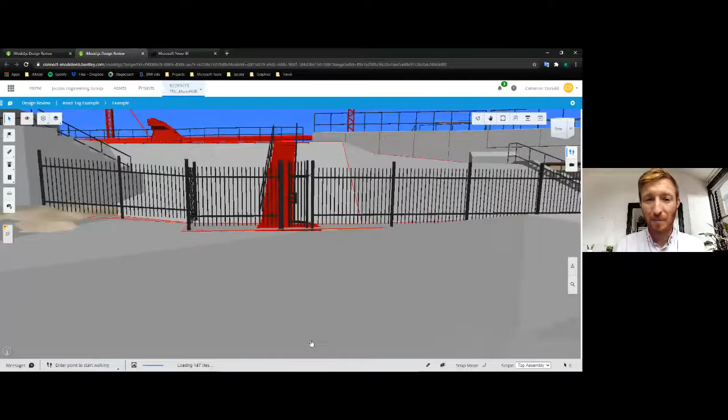This includes on-site insights, and this is of course the first digital one in the current climate. You'll see us as we are now, here on part of the Trans-Pennine route, about to enter the railway. We also do talks from the top, in which senior members of organisations give insights about asset management to our members, other networking events and new methodologies such as hackathons, and we have our own conference stream.

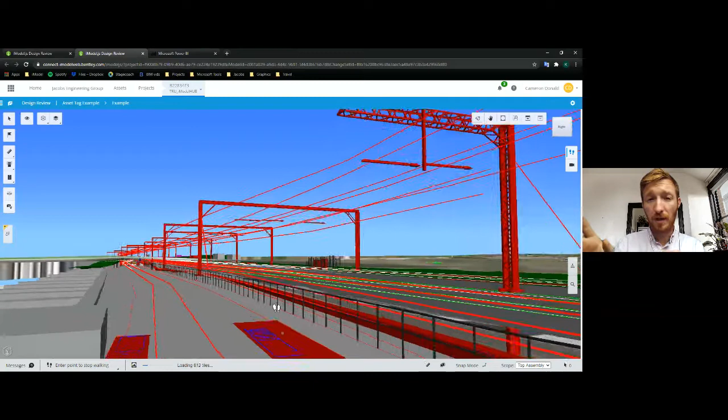Hi, good afternoon, and pleasure to meet you all virtually. First time I've done one of these myself, so it's an interesting and new experience, and enjoyable so far. Hopefully you all enjoy this journey with us.

So what I'll do is give you a little bit of an overview of what TRU is and a bit about our team, and then we'll go into more detail about some of the disciplines that make up our team on TRU.

So the Trans-Pennine route upgrade, we keep saying TRU, is a rail upgrade and enhancement program that runs from Manchester Victoria to Leeds, and then on to York, calling through stations such as Huddersfield and Dewsbury. It's a mixture of new build and also a mixture of renewals of existing infrastructure.

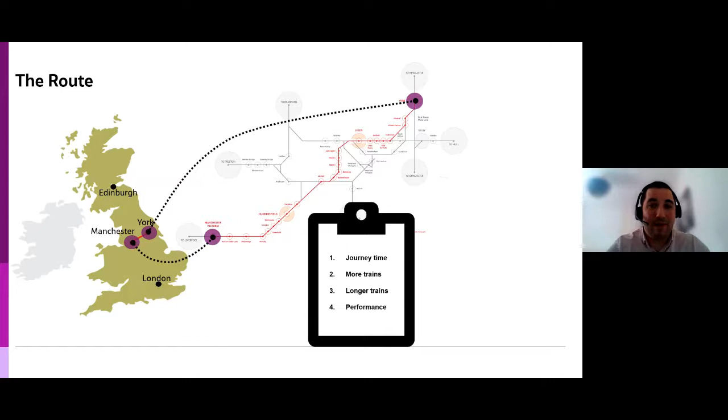It's got four primary objectives. One is reduced journey time, so A to B to C faster - faster times predominantly between Manchester Victoria and Leeds station, and between Leeds and York and vice versa.

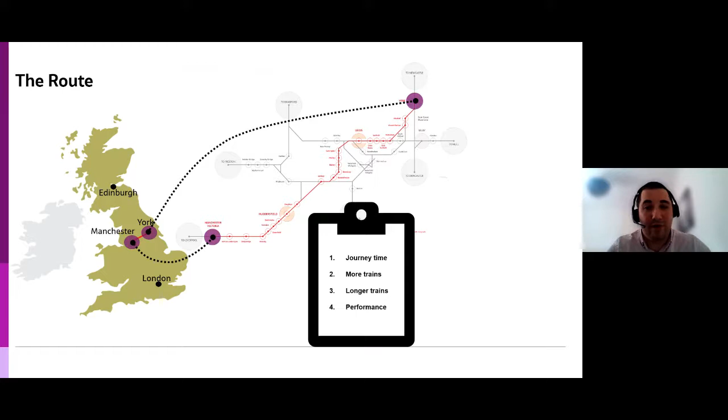It allows people to commute between these major cities quicker and more efficiently. More trains, so more services running, longer trains - going from 3 carriages to 6 carriages in some cases - and increased performance as well. That's timetable performance, but also performance related to infrastructure reliability. So can we make a railway that has less infrastructure failure and therefore fewer service-affecting failures, so your train turns up on time or within a reasonable amount of time of its arrival or departure.

It's a multi-billion-pound program, currently over 700 people on the program - that's probably nearly going over to 1,000 now. It's continuing to grow, and it will continue to grow as the program develops.

It's a very diverse program made up of different organisations supporting Network Rail. We also have alliance delivery partners split by east and west of Leeds, so lots of familiar names there like Arup, Amey, Bam Nuttall, Systra, Volker Rail, Siemens. So there's pretty much a lot of people involved in this program - it's a very complex program - and obviously all of the subs below that as well.

In terms of assets, we've got quite a lot of assets on the program, over the 110 miles of the route. A lot of that infrastructure is aging and has been maintained well over a period of time, but it is now challenging to maintain at the moment. So it is a part of the network that is very ready for an upgrade and an enhancement, and we'll talk a little bit more about that and how we're helping with that as we go through.

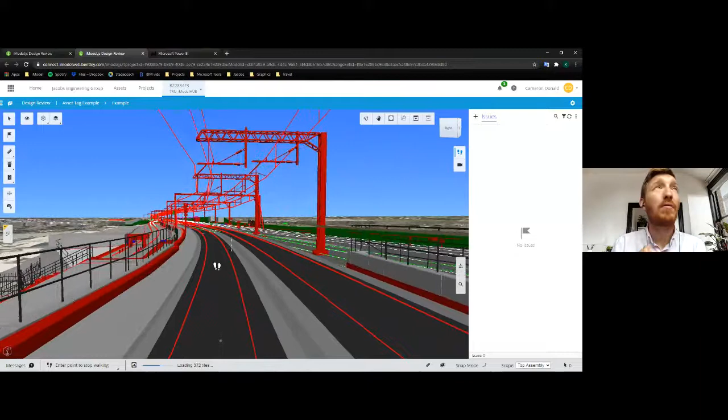Essentially, one of our findings throughout this program is quite how much diamond crossover assets contribute to lifecycle cost of a potential project. A diamond crossover is basically a piece of switches and crossings which enables a train to cross in either direction between two parallel tracks. It looks like a diamond, but the cost of operations and maintenance of that asset throughout 100 years can be quite significant. This is just one of the small findings we've encountered throughout the TRU program.

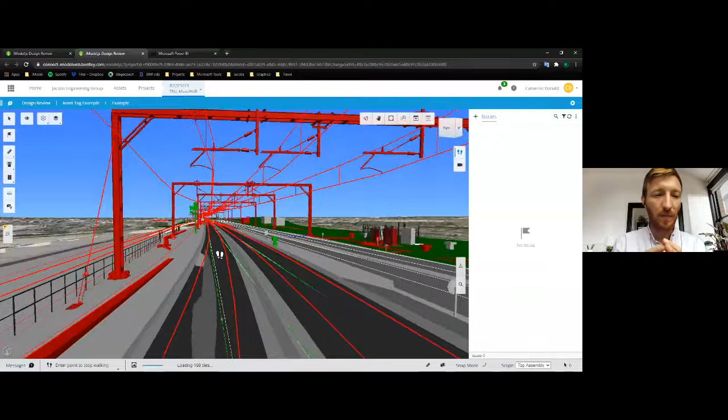Network Rail have a requirement that any project of over £3 million value must select the lowest lifecycle cost option, or present justification to the route managing director - a very senior person within the region - as to why it's been selected. This means lifecycle cost must be considered at all times. It doesn't have to be based on lifecycle cost justification, but if not, it requires other justification as to why it's been selected.

Essentially, the application of these principles is aimed at enhancing the financial sustainability of the railway, which benefits everyone - the taxpayer and Network Rail.

TRU is basically the first time this level of lifecycle cost analysis has been undertaken on a major railway infrastructure program. In this time, we've worked with Network Rail Advanced Analytics team using their proprietary tool to both complete lifecycle costing, but also embed it within the decision making of the TRU program. So all decisions on major project interventions are based on lifecycle cost, or incorporate lifecycle cost thinking.

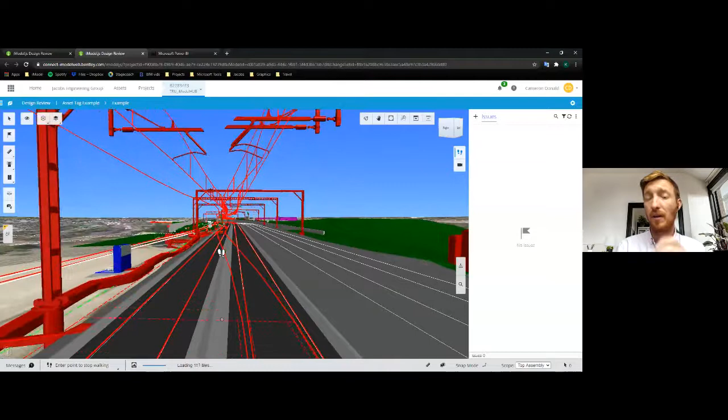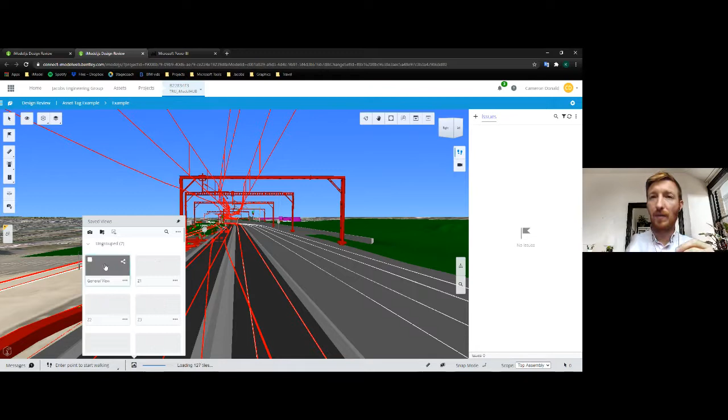Essentially, what this means is we have a number of asset lifecycle profiles which are based on data from Network Rail Advanced Analytics, and each one of these contains unit costs and different types and frequencies of interventions. Each different intervention on a project is modelled using these lifecycle cost profiles and aggregated together to produce a 100-year lifecycle cost calculation.

These are then used within reports, at points when decisions have to be made. So during option selection, during different project options, we have produced reports stating whether the lowest lifecycle cost option has been selected, and if not, requiring justification to be provided to the route managing director.

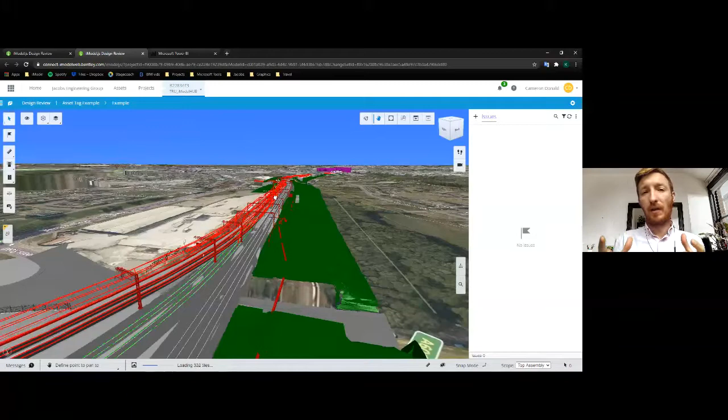Our involvement has included, and this is one of our really big successes I think on the program - we've managed to incorporate lifecycle cost at the early stage during validation panels. In a validation panel, the delivery partner gets lots of experts in the room to discuss the different options from a range of perspectives, whether it be engineering, environmental, lifecycle cost, etc. Embedding lifecycle cost into that process has shown significant value in contributing towards the decisions made.

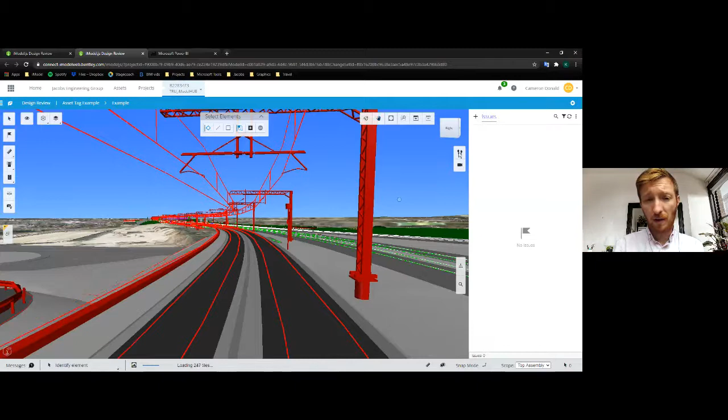We've also been involved in modelling route-wide options. We've modelled over 10 route-wide intervention options, and these have been used to present to the Department for Transport during the business case work. I think this is really key.

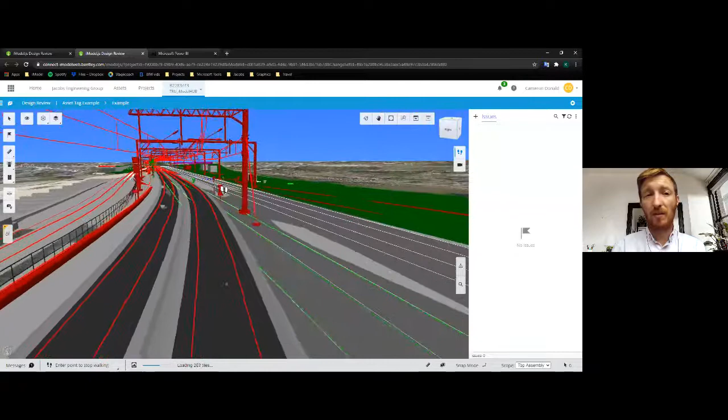The application of lifecycle costing on this is really key, in that one of our main aims outside of supporting the project is actually to learn lessons about how to embed lifecycle costing as a process inside major programs. Because this is the first time this has been done, in future we'll be better able to use lifecycle costing to make decisions, which will lead to greater financial sustainability of the railway. Some real major outputs I'm looking to create include lessons learned and feedback developing processes with Network Rail, so lifecycle costing is applied across all major programs in future. I'm going to pass over to my colleague Graham Hall, who's going to tell you about improving the maintenance and operations of the route.

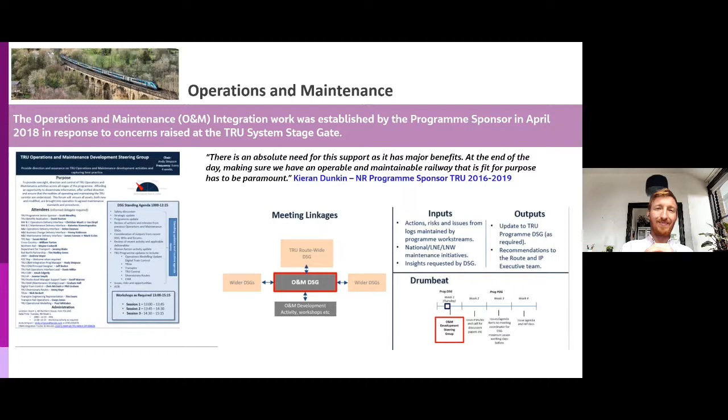Over the next few minutes, I'll describe the journey the programme has taken to ensure the maintainer and operator's needs are being considered and delivered within design proposals. I'll describe the processes followed to get to the recently reviewed GRIP 4 proposals for asset maintenance delivered for the location we were just at in the model at Miles Platting, from the West 1 project running from Manchester Victoria East through to Stalybridge. The proposals recently agreed with the maintainer reflect a necessary transition from current daytime working between trains for track maintenance to planned overnight possession working, assisted by new fixed worksite lighting along the track running from Victoria Station through to Miles Platting.

Changes like this in maintenance practices are being delivered as a result of good operations and maintenance engagement undertaken through the design and construction process for TRU. This engagement has been pushed heavily throughout the programme by the principal programme sponsor, to help ensure on completion the Transpennine Route Upgrade delivers a reliable, maintainable and operationally flexible railway that customers, both freight and passengers, desire, with the capacity to meet their current and future needs.

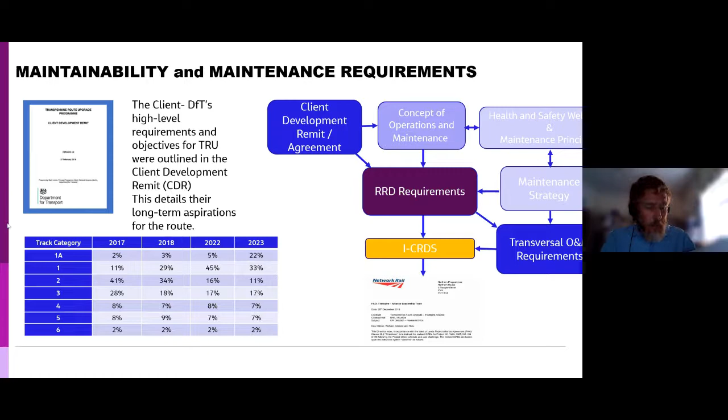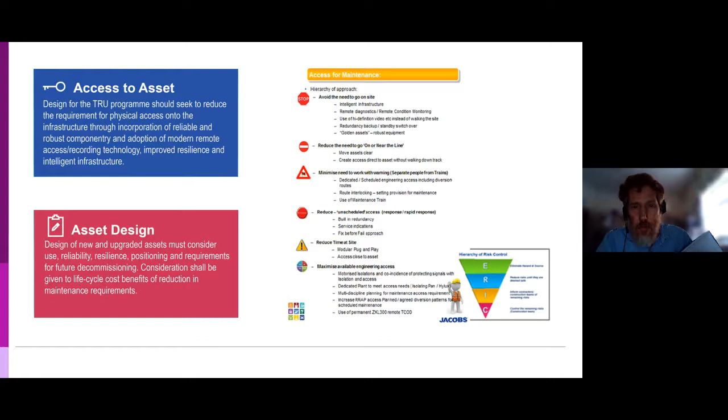The first principle here is obviously avoiding the need for staff to go onto the railway in the future to maintain it. And if you can't avoid physically going to the asset, well, site it in a position of safety, not on or near the line, if at all possible, and so on and so forth.

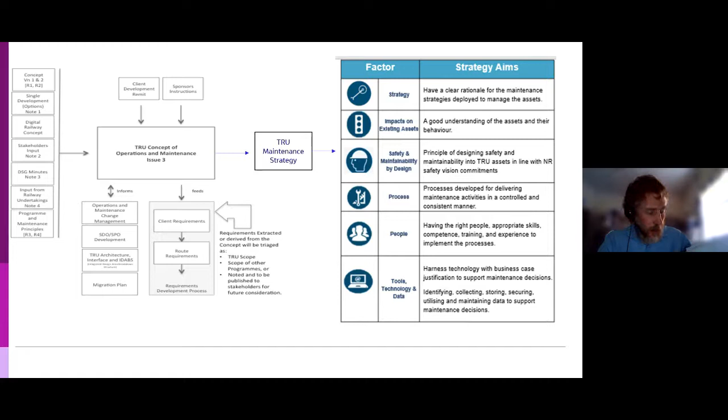Next slide, please, Blair. So here you can see some of the inputs and outputs to the concept of operations, which was developed over a number of months and iterations and a series of very long 2-day meetings with representatives from both routes. To the right, you can see a diagram that illustrates some of the detailed sections contained within the maintenance strategy.

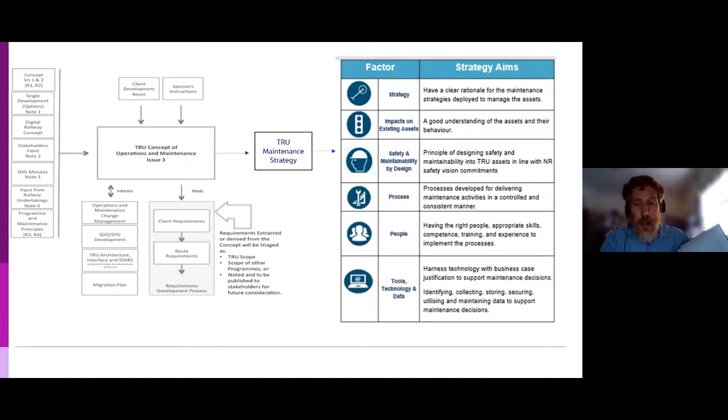Both of these documents were produced in 2018 to reflect the programme outcomes expected at that time, and they're both currently under review to reflect some of the changes that the government is requiring of the programme announced recently.

The next slide, please, Blair.

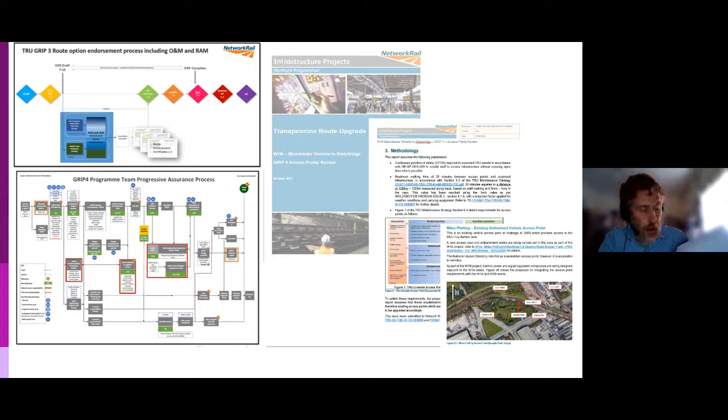This next slide reflects the endorsement approach that's been taken by the programme at each GRIP stage of design development. To pass a GRIP stage, the programme sponsor was adamant that all design proposals needed the endorsement from the relevant routes, head of operations, head of maintenance, and head of route asset management. This was to ensure that relevant consideration had been taken and provision made within design proposals for operations, maintenance, and long-term asset management needs.

On the right, you can see part of a West 1B's GRIP 4 access point review document with the considerations made at Miles Platting for both West 1A line speed improvement works and a parallel project called West 1B, the electrification works running through Miles Platting, starting at Victoria Station and continuing through to Stalybridge.

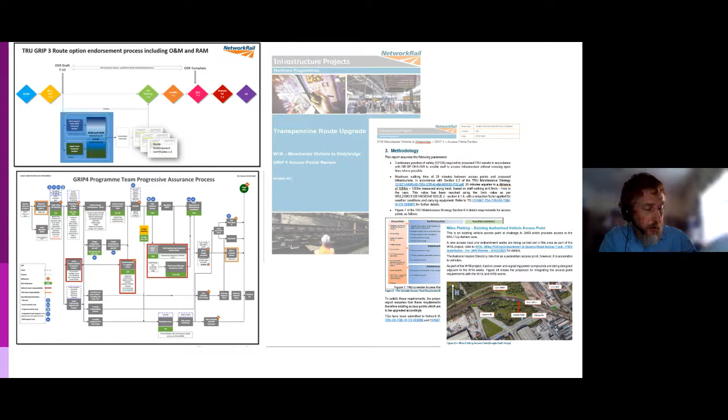And then finally, the last slide, please, Blair. This illustrates the many aspects of the PRAM team, which I lead, and the activities the PRAM team undertakes across the programme to help inform designs on the issues currently causing pain to performance of the infrastructure and the impacts design proposals may have on future infrastructure performance and maintainability.

So as we return to Miles Platting and the model to hear more on our modelling and analysis from Aaron and Blair, I'd like to remind you again, if you've got any questions on what's been said so far, please put your questions in the chat for us to respond to at the end of the presentation. And I pass you to Aaron Johnson.

Good afternoon, everyone. My name's Aaron Johnson. My role on the Trans-Pennine route upgrade is to undertake PRAM analytics, and as Graham and Steve have mentioned before, PRAM stands for performance, reliability, availability and maintainability.

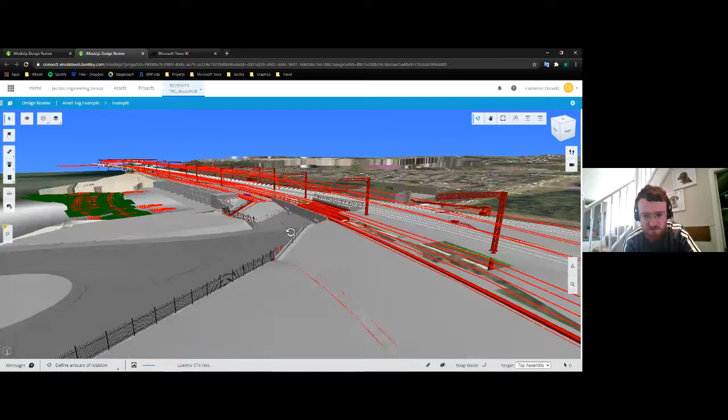A core role within the PRAM team is the modelling activities which we undertake to assess whether design will improve performance to the passenger. In the railway, performance is measured in delay minutes, which is the difference between the actual arrival of your service versus the scheduled arrival. I think a lot of us on the call have probably experienced delay whilst travelling on a train before.

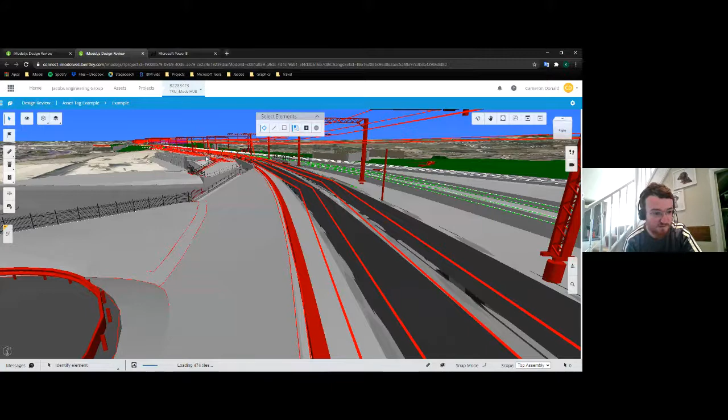With that, I'd like to use this opportunity on the digital on-site tool to talk to you about a particular asset which causes the most delay on the Trans-Pennine route upgrade as an asset type, and is arguably one of the most recognisable assets in the railway, which is the track.

Now, on the face of it, track seems probably quite simple, but actually it comprises of 3 different elements that most people probably aren't aware of outside the industry. One is the track bed, which is what the rail lays on, which is the ballast. Ballast is the stones you often see around any railway network. Then also the sleepers, which I think we're all familiar with.

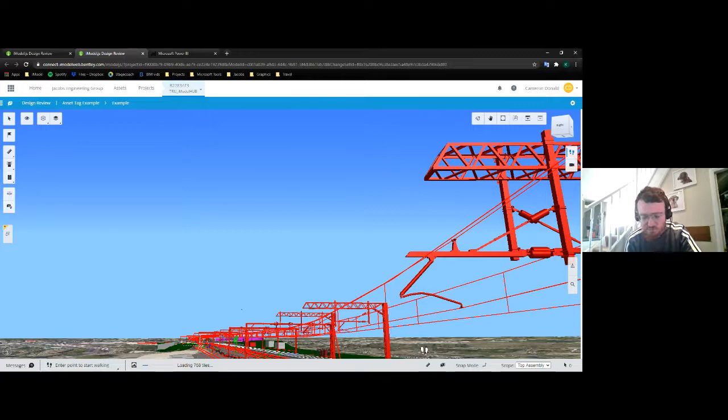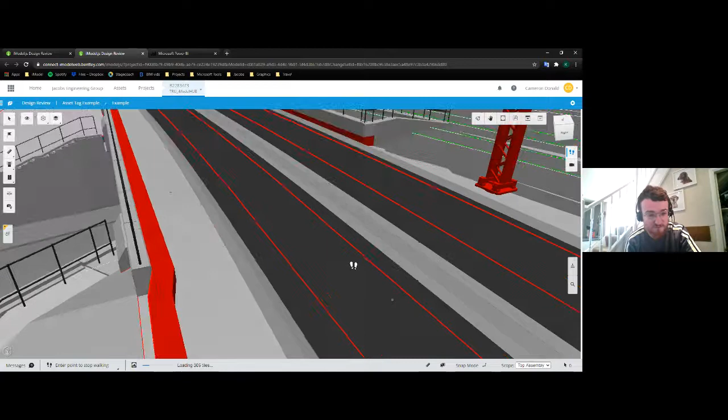Then also we have the running rail, which is usually made of steel, and you have different grades of steel. The steel gets harder the more it's used. So if you have more trains per hour, you'll see that in that area the steel is a higher grade. And then the last element is track fastenings, which essentially keeps it all together.

Because we've got these 3 different types of elements, that means that track can fail and cause incidents in different ways. Depending on the incident, that has a different likelihood of causing a different amount of delay. But having said that, when track does fail, it's quite common for it to be reported in the same way, and that is from the train driver.

So on a typical track incident, what would happen is the train driver will be driving along on the track as we are now, and they'll experience a loud bang in the cabin. Usually when they hear a loud bang, that indicates that there's a fault with the track. When that happens, they phone it in to Network Rail and say, I experienced a loud bang.

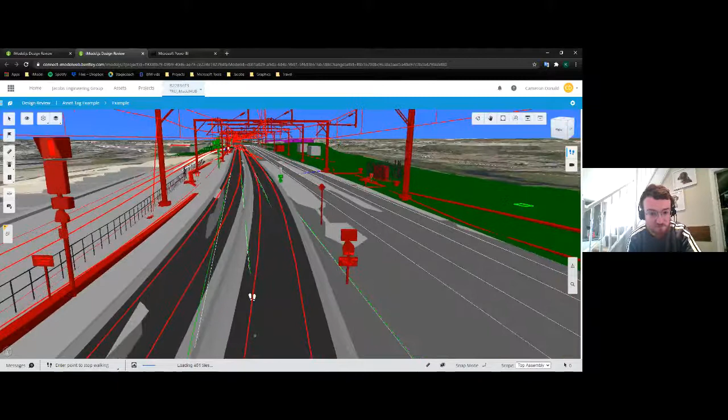What Network Rail will do then is, because they can't go on site there and then and shut it all down since we've still got trains to run, they'll impose something called a track speed restriction, or a TSR. A track speed restriction means that until Network Rail go on site to inspect what happened, all trains that go through that area of track will have to drive at a slower speed.

And as you can imagine, if that's going on, some of these can last for weeks, depending on the time they can get on the track. That can cause a significant amount of delay.

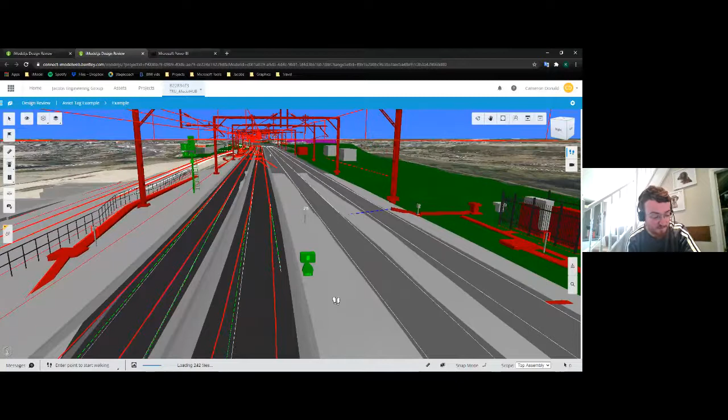So with these types of incidents, what we do in the PRAM team is we look at the hotspots - we call it a hotspot. So where these incidents are most frequent on the network and cause the most amount of delay, we use that information to inform the designers to ensure that those assets and those areas are targeted for investment.

And then we go a bit further than that. So that gives you what's happening today, but we also give a forecast on the future, which we achieve through looking at the wider network and looking at what we call case studies of where Network Rail went in to intervene - so they did a renewal or a refurbishment, for example - and we look at the average delay per year of that asset before and after, and that gives us a level of improvement.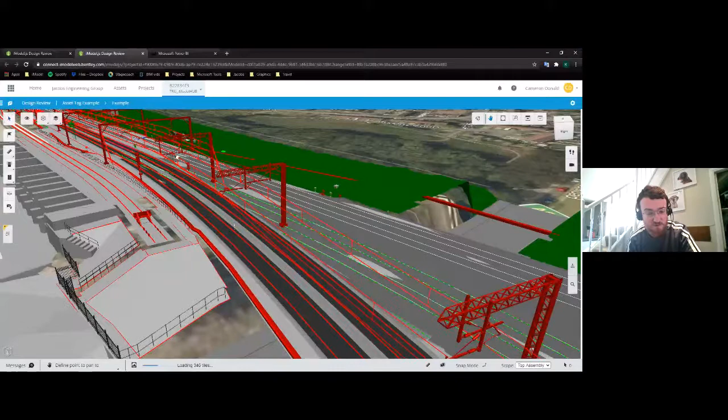And that level of improvement we feed into our model to give an indication of what the Trans-Pennine route upgrade will look like in the future after we've delivered our design. Up till now, I'd say up till probably about Christmas, we've been doing something called option selection, which is GRIP 3 in the railway. That means our modelling activities have been quite high level, and we look at different options.

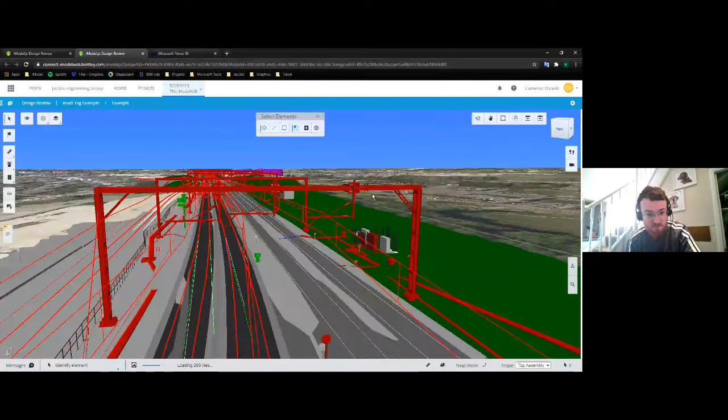So one option would be a discrete section of railway that could have full electrification, and a second option in the same area which could have no electrification, for example. We'll do modelling activities on both to see which one's the preferred option from a PRAM point of view.

As I say, this is quite high level. Now, this year and going forward, we'll be going into something called detailed design. That means we've selected the option we're happy with, but we need to provide insight on an asset level of how well or badly that asset's performing.

With that, we've started to implement machine learning, and we've only been able to do this recently because we've established a central data warehouse, which my colleague Ross will be speaking to you about later on.

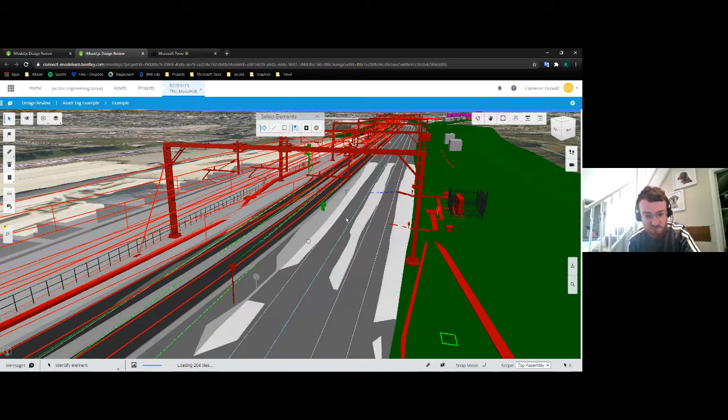With this central data warehouse, that collates a lot more data than we've seen previously, but also brings in external data such as from the Met Office, so we can look at temperature and weather and see how that corresponds with when track fails, for example.

Going back to track, during summertime they can buckle. Steel expands when it gets to a certain temperature, they start pushing against each other, and the track buckles, which causes another incident. That's why it's important to feed in this external data, so we get a more complete picture of what's happening on the railway.

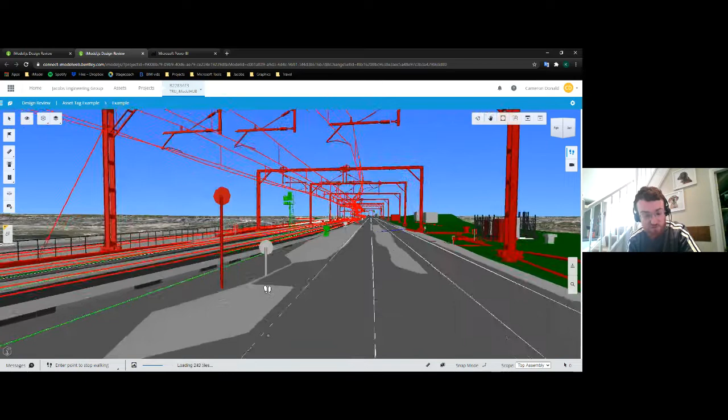With that, I'd like to now move away from the 3D model, which does look really good, so apologies for that, but I'd like to talk through the machine learning outputs and give a good example of what we are doing on the TransPennine route upgrade. So we've got a slide open here.

The first one on the left is going to be a 2D visualization of what we've just seen in the model, and I've highlighted a piece of track there.

As you know, track is a linear asset, so from an asset management point of view, we need to break that down, and it needs to be maintained in parts. In the railway, it's traditionally broken into 1/8 of a mile track sections, and that aligns to the level of detail we model to.

So I've highlighted this piece of track where we were on the 3D model. The first part is to understand: is this piece of track performing worse than what we've seen before?

Going into the next block, we can see the delay now. You've got average delay in minutes per year. This piece of track, this 1/8 of a mile, is causing 93 minutes delay, compared to the average for TRU, which is 48 minutes. You can see there's quite a big room for improvement.

So from a PRAM point of view, that's quite high. We need to focus on this. We need to make this better.

The machine learning first gives us an output detailing the potential leading contributors, the causes of delay, if you like. In this case, the top two are tonnage - meaning the number of trains per hour, or utilization - and the second one is asset condition, which is how old it is.

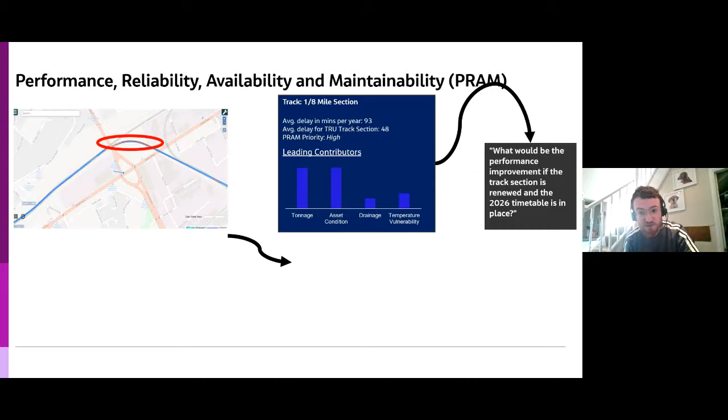In 2026, we're expecting 2 more trains per hour, which was covered before by Steve and Graham, which means we expect the asset's going to be used more. But then what if we renewed this asset? What improvement would that give us overall?

So when we run this scenario into the machine learning model, it undertakes these scenarios in a matter of seconds and gives us an output as follows: you can see that with the 2026 timetable, tonnage is going to cause more towards the delay this asset's going to cause.

But then the renewals had quite a big significant improvement with the asset condition. It's improved quite a lot.

So this is all good, but the final output, what the designers want to know is, what about the passenger? Because they're the people who matter. What will they see? So we give an assessment of before and after in terms of delay. Before we're seeing 93 delay minutes, but with this scenario, if we renewed this 1/8 of a mile track section, we would expect it to be reduced to at most 56 minutes. You can see there's an interval there with 90% accuracy, that's to do with the model. So it seems like in terms of the investment, we're going to get quite a good improvement here. So this is probably what we should be doing.

Hopefully we could speak quite a lot more about this, but given the time, we can't. Hopefully this has given you a nice snapshot, a nice taste of what we've been doing. Another key point is at the moment this is informing design. The aim is hopefully we can make this more an O&M decision support tool as well, for the maintainers, because in this instance we can see that although we've renewed the asset, when it fails in future, it's probably not going to be due to the condition, and it's probably going to be more due to the amount of trains, which means we need to assess whether our maintenance regime's fit for purpose.

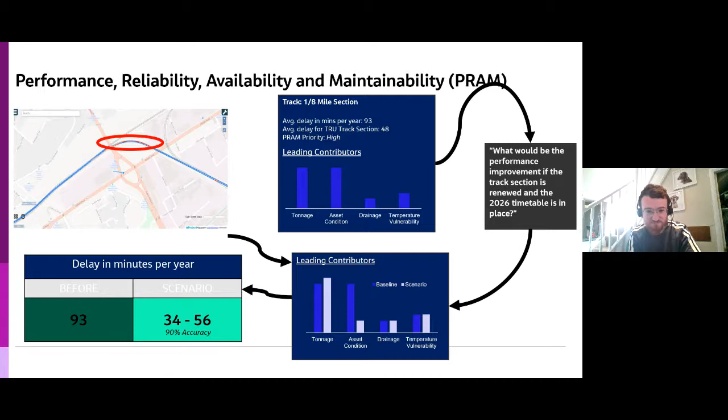Thanks, Aaron. So as Aaron said, my name is Blair Whittaker. I also reside within the TRU PRAM team, and I'm a reliability, availability, maintainability, and also I do a bit of system safety as well.

So as Aaron said, the work that he's been doing with this wonderful modelling gives us a snippet into the future on what could be and what we could expect to see. But to help start the design process, we wanted to understand what are the known problems and what are the current issues. So in order to do that, we undertook a route failure modes, effects and criticality analysis.

Now, traditionally, a FMECA, as they're called, or FMEA, as it may also be termed, is undertaken by a team of technical experts, operators, maintainers, and they lock themselves in a room and basically go through every single nut and bolt of a component, an asset, a system of systems, and establish every way that that could fail, how it could fail, why it could fail, and the effects of that failure.

Now, where that is not replaceable, we felt that in TRU we wanted to take a slightly different approach. Within our role, we're in the program management team. We wanted to give a bit of direction, and our assessment was to be high level. So in order to do that, we decided to take a data-driven approach.

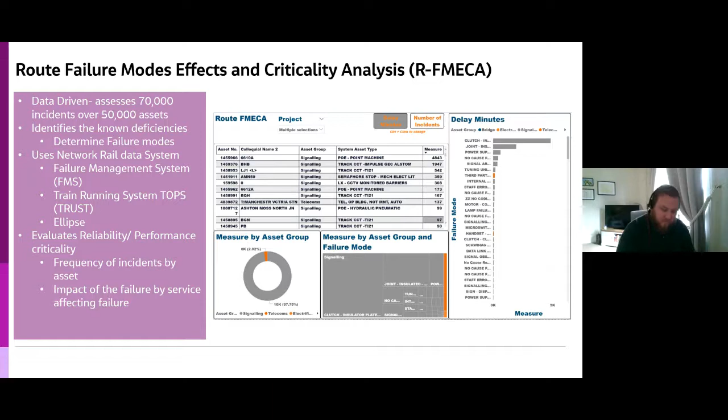I'll give a quick example of how this could be used. Looking at the same dashboard, we can select an asset. I've picked the top one for the area - project multiple selections, roughly the area you've seen on Insight or Onsite Insight. This one is point operating equipment - the mechanical, electronic, or sometimes hydraulic pneumatic system that allows the switches on the track to move.

We can see that this asset has caused 4,843 delay minutes. Now looking at the key failure modes, I know - because I made this tool - that this is a clutch insulator plate. The clutch insulator plate has failed in this asset, leading to this failure, at a key area on our route. So if we can't use the switch, we can't manoeuvre trains in and out of certain areas.

We also have high-level dashboards showing the proportion of this failure against the system. You can see that the majority of issues are related to signalling, which this point operating equipment is part of. Finally, we can see the proportion by failure mode - this is, as you can tell, the largest incident, the most significant failure mode.

However, this tool looked at the past and a static set of data, which allowed us to begin our design process and allowed the designers to take a deep dive and understand these problems more in depth.

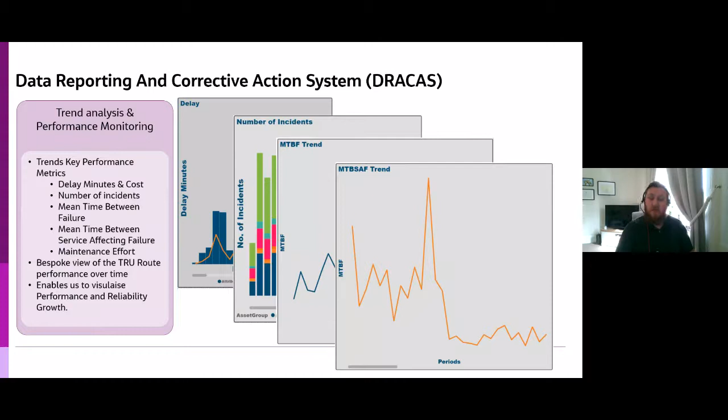Moving on, the next section, most important, is our performance, or program introduced performance impact. This is probably the core of what people would expect DRACAS to be. This, as the title implies, is what we do as a program during the design, the construction, the testing, the implementation, the hand back to maintenance, and potentially also the rest of the life cycle of that asset to decommission.

We want to understand what we have done that's good and bad and improve that. As a program, we have a duty, or are accountable, to ensure that the impact of our work does not affect - we have to minimise that effect on the passenger during our programme life cycle. So this is to help us collect and examine the performance information.

We wanted to look at things such as possessions - when we shut a section of the railway to do some work overnight or at a weekend, etc. - and understand the work that we've done. It also complements some of the work we've done elsewhere, so other lessons learned programmes, such as design close calls and the general lessons learned system we do. But the most important thing is this is done on a periodic basis, every 4 weeks, so this review and collection of data allows us to understand things in a timely manner.

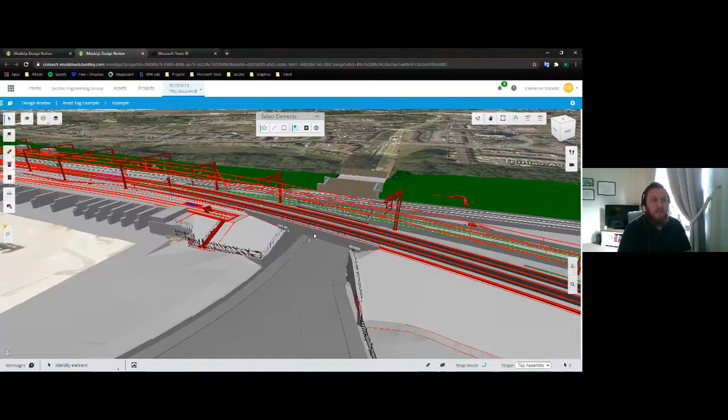When you see all the red here, this is generally stuff that we plan to change or put in or propose. So in the area here, there's a lot of red, specifically the overhead line equipment, which is the electrification system that allows us to run electric trains in this area.

This is quite a bulky and considerable asset. So in order for us to install and construct this, we have to take possessions of the railway. We would take a big chunk of the railway for 8 hours, and these can cost a considerable amount of money, millions of pounds.

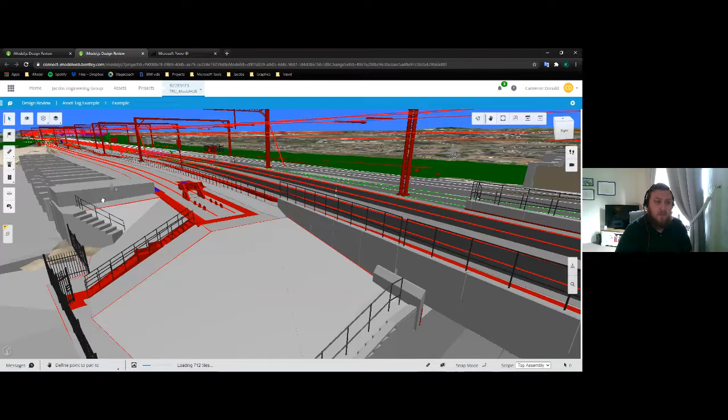So first of all, we want to understand, are we doing every conceivable bit of work that we're doing in that area? Can we do more? Are we doing everything we can do?

Secondly, we want to understand, if we take that possession for 8 hours overnight, and at the end of our 8 hours we still haven't finished the work, and the first trains can't run in the morning, causing a delay, that's a performance impact to the passenger. We want to understand why that happened and how we can improve it, so the next time we take a possession we don't have that issue.

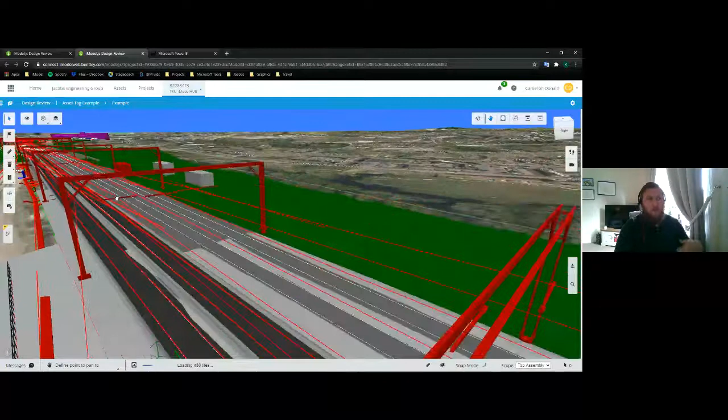Also, as you can imagine, with massive construction jobs like this, there's going to be bits and bobs that never ever get finished. That will comprise a snagging list, and we want to understand what's going to be on those lists, so that the first project where we do this kind of work is our test bench. We understand the problems that arise and the issues we've developed, and from there the follow-on projects don't have these same issues.

So again, all of this is data driven, and none of it is really possible without having a connected environment, a connected data environment, and a way of visualizing it and understanding it.

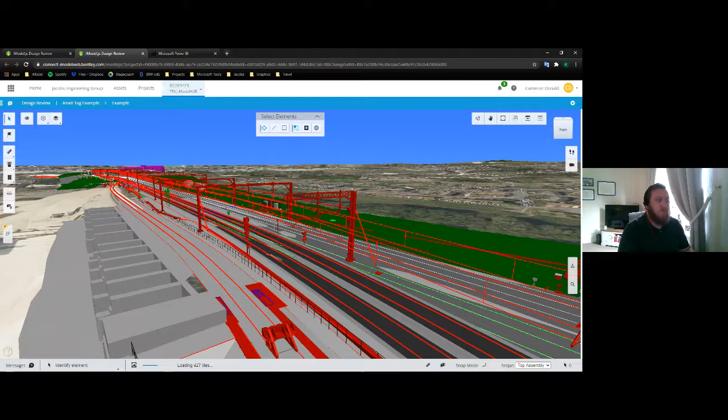So as Blair said, I'm going to be talking a bit about the iModel, which is what our visualization tool here is called.

So all the model that you're seeing here is brought through from our common data environment, where all our CAD modelers work, with other workflows, etc. And what it does is it brings all of that information up into the cloud server here for the iModel, and it presents it all for us.

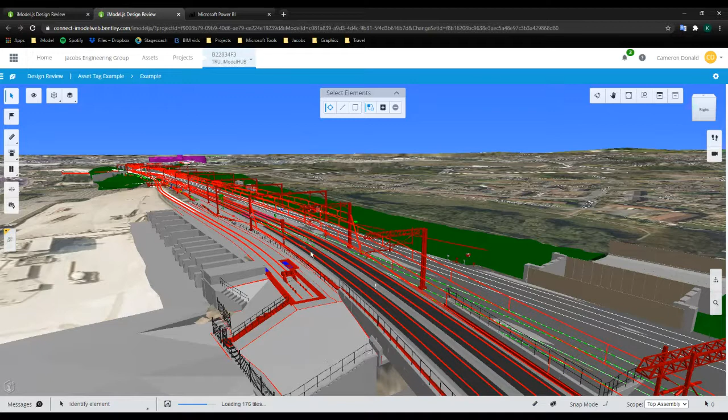So all you need is an internet connection, correct permissions, and you can come and see this, CAD personnel or non-CAD personnel. So it's extremely easy to share with just about anyone on the project.

And the main thing about this, as we've all said, is this isn't just a pretty picture, it's data rich. Every piece of this model has tons of information assigned with it.

Now, one of the things I wanted to show off is some of the functionality this has, both for CAD personnel and non-CAD personnel to use for things like IDCs, IDRs. One of the first things is the issue resolution feature, for identifying different technical issues with CAD.

So let's say we're coming in to do one of these reviews and we notice there's a technical fault here, there's a clash. We open up our issues resolution tab, and we can assign it with just a couple of clicks.

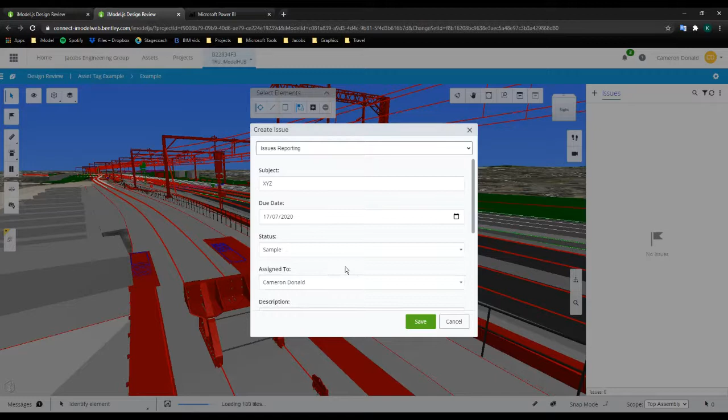So there's the area for our different issues, which opens up a form for us to describe what this issue is, so anyone who comes along can easily identify what it is. We'll just throw in some placeholders here: the date we'd like this to be analysed or reviewed by, the status it's sitting at, and whoever we're assigning it to. Anyone this gets assigned to will get notification through their connection client and also an email, so there's no chance of these issues getting lost in the ether.

Description there, and we'll save it.

One of the powerful things about this issue resolution feature is that you're not going to have one issue in here, you're going to have a list of issues. The power with this is it saves a little thumbnail for you. So let's say we're in a totally different part of the model. With one click, it will zoom us right back to the location of this exact issue. We can come and click in and say, okay, here's what it is, here's the issues with it, how do we resolve this. Then once we've done it, edit, and we can close the form.

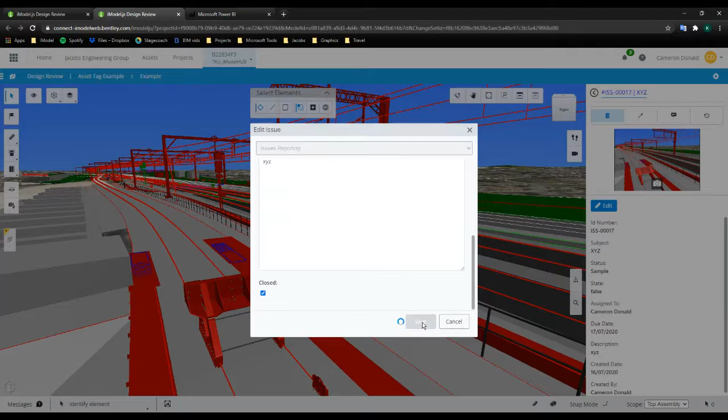Simple as that. So in terms of technical issues, IDCs, IDRs, the ability for anyone to come in and see this without having to have a super powerful computer with the correct software installed is immensely powerful. So that's just one of the tools that we have, the issue resolution feature for any sort of technical CAD issues. Now another feature we have is called the safety base.

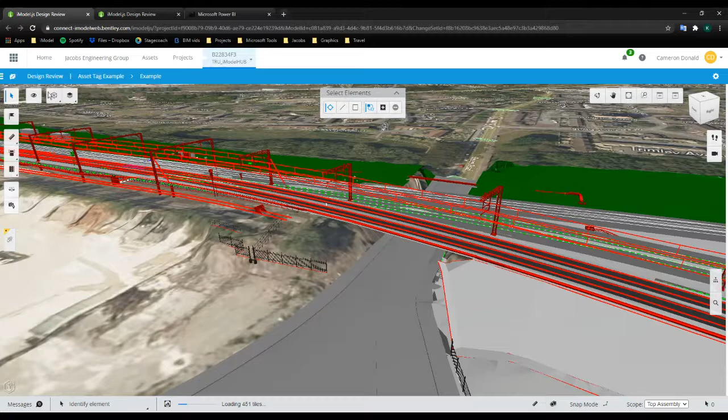This is less about technical issues and more for safety hazards and things like that. Again, with a couple of clicks, we can come and open up our safety base.

What this allows us to do is see any of the safety hazards that people have assigned to this model, and similar with the issue resolution tool, see exactly where they are and the description, any of the information behind that hazard. So give this a little second to pop up, and we should see everything here.

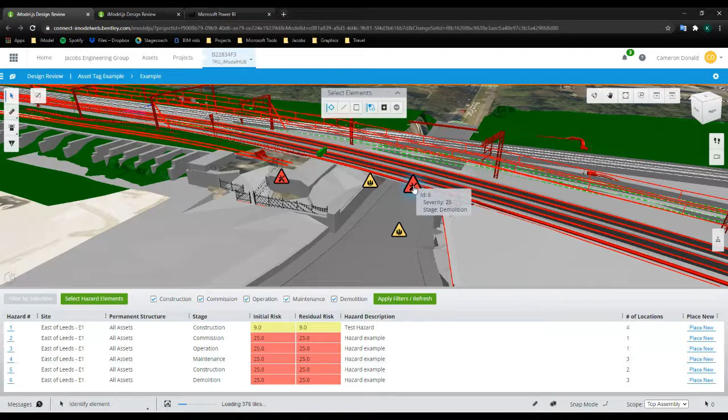As I said, we have different locations of hazards that have already been identified. Again, this can be across the entire model, and with just a couple of clicks we can go and visit each one of these. Let's just have a look at this hazard right here. I'll open up a separate tab for us.

Within here, we can see information like the severity of the hazard, all the descriptions against it, who created it, when did they create it, what area is it sitting in, what asset is it assigned to. Again, we can assign this anywhere in the model we like, and anyone with the appropriate permissions can come and assign this sort of stuff.

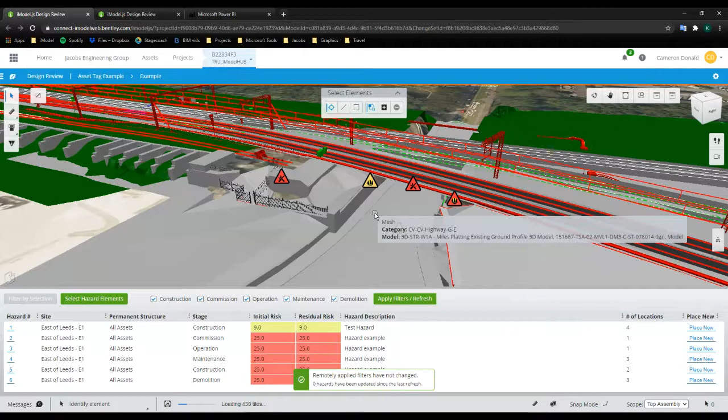So when you're doing your IDCs, IDRs, technical issues, sorted, any safety hazard issues, sorted as well. Easy to use, anyone can come through and use this. The last thing I want to quickly touch on is, as we've said multiple times, this isn't just a pretty picture. There's an unbelievable amount of data stored in this model, and I'll show that off to you right now.

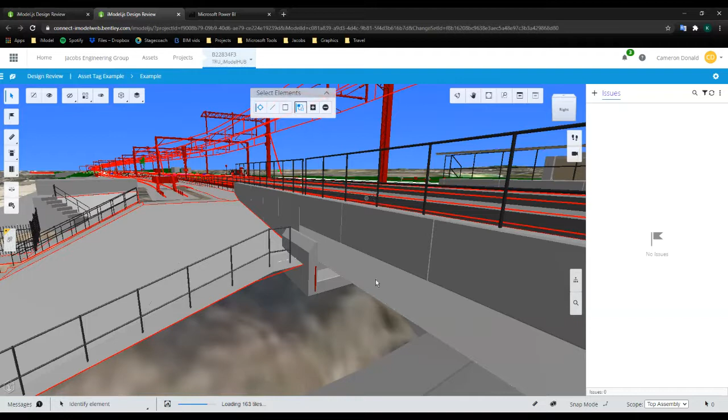So I'm going to come and look at our bridge asset here. Just as an example, we're going to click on this concrete beam, and straight away we can see all the asset information assigned with this.

Scrolling up and down, one of the powerful things we have against this and against all of our assets is a unique asset ID. So say we don't only want to look at this concrete beam, we want to look at this entire bridge section. What we can do is come and look at the unique asset ID that's been assigned here.

And we can find all that are similar. So let's do that. What that will do is search that unique asset ID against all of the assets with that attribute assigned to them. One of the cool things we can do within this model is we can select all of these assets.

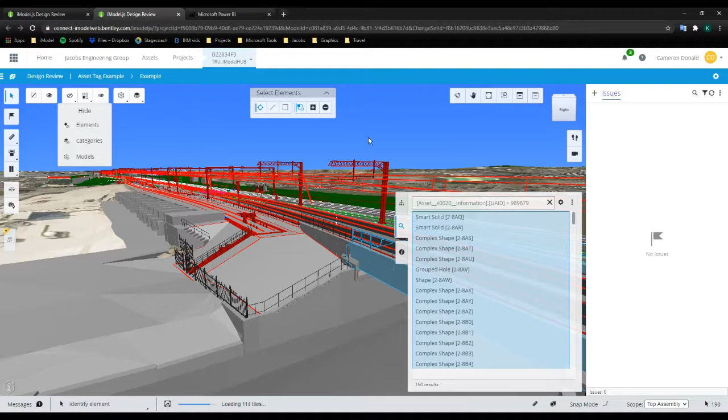And we can hide them, or we can isolate them. What that allows us to do, it's not deleting any of the model at all, it's essentially just hiding it. So if we have a certain part of the model that we want to isolate and analyze, we can easily do that. This will work for any part of the model, again they'll have these asset IDs assigned to them. So we can do that and look at any part of this.

The very final part of the data journey with this is that, along with isolating different parts of the model and being able to search against these assets and attributes, we also have a dynamic report that bounces off this as well. And I will let my colleague Ross speak more about this.

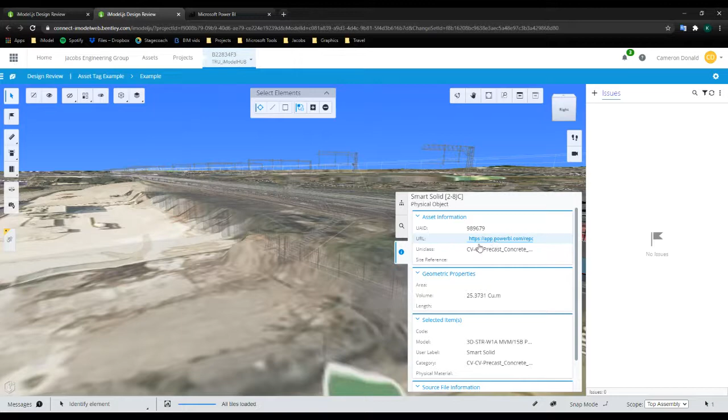Good afternoon everyone, my name is Ross Chapman, and I'm the Asset Data Specialist on TRU. I specialise in data storage and data manipulation, and today I'm going to talk to you about our data warehouse. It's something a few of us have mentioned. I want to give you a bit of an overview of what these things are.

That's great, we've got two big bits of data. That's something we can probably always handle in a decently managed Excel spreadsheet. But now, as Blair's mentioned, there's Ellipse, FMS - we have work orders, and each of those work orders against an asset will have events.

And actually what we have in our ecosystem, across all this data, is millions and millions of lines of data in this data warehouse. Rather than go into the technical detail today, I thought I'd give you an overview of what a data warehouse is, what it means, what we're really talking about when you hear these buzzwords, and how it can empower your asset management decisions.

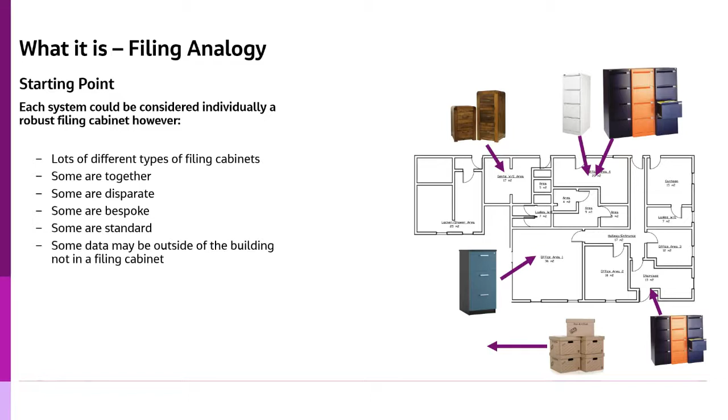Our approach is quite simple. First of all, we transition it all into central cases - we run some very big scripts, pulling that data into central databases. Then we standardize - so a couple of those now flip and change their format. When we say standardize, we make things into common language. So that cardboard box is gone - it's now appeared, that bespoke one, into that nice colored, multicolored cabinet there.

The next thing we do is union. Union's a bit of a database term, but in essence it means copy and paste and put it on the bottom - so we make our data very big into something very manageable. So we have standard data - I don't mind if assets come from a spreadsheet, or from a big system like Ellipse, which Network Rail use, or another database. We get it all into one big database so we can give it to people like Aaron and Blair to run their algorithms. The next key step in our process is to connect these.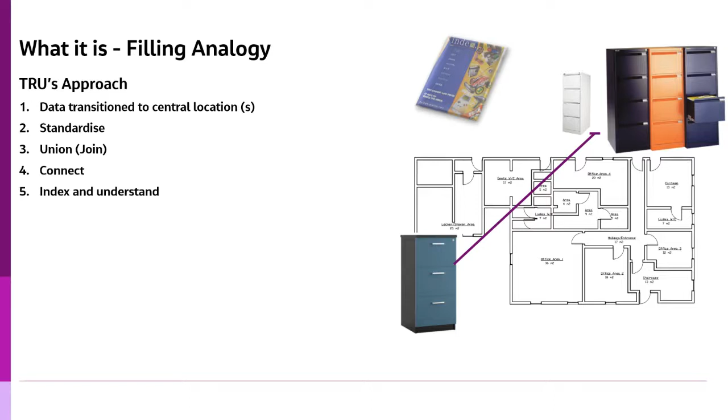Now, what does that mean in this filing analogy? Just move on to the next slide here, please. So the first thing I want to talk about is understanding.

So a good question here: what was the weather on the train journey last Tuesday? If you go back to that filing analogy, a filing assistant could really easily go to the calendar and ask what the date was last Tuesday. They then go into the train system, look at the logs, and find out where that train was last Tuesday. They can then go and look at the Met Office data and find that weather. That's a very one-to-one relationship—something your filing assistant can do, and do as a one-off. Yes, you could do that if it was a one-off query.

But the key thing is, with that understanding, we've understood those joins. Can we apply a similar set of joins and apply them to bigger ones?

So the next bit here, I want to talk about connecting—similar sorts of bits of data. We want to slightly change the question here: what trains were moving when the temperature was below 0 degrees?

Similar components here: really, we start off with the Met Office. We go into the Met Office and find all dates and all locations where the weather was 0 degrees. We're talking about a lot of data very often, very quickly. Then it gets exponentially bigger again—we have to match that data to the locations of track.

So we're out of the realms of a filing assistant here—we're now into the realms of connecting it. We then have to go into trust and connect it, get those train locations and dates, and filter it. So what we're saying is this understanding and connection empower our calculations.

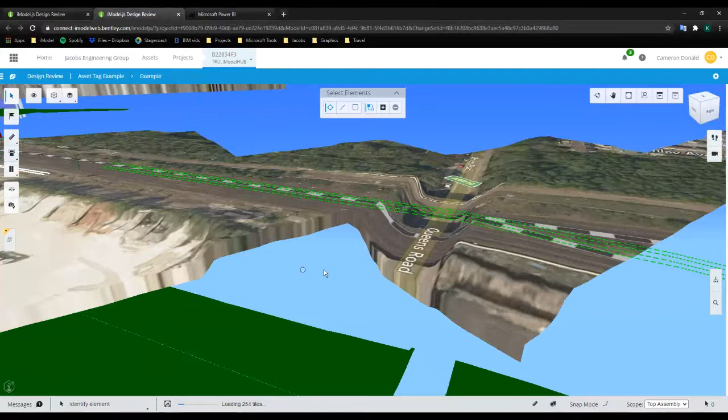So as Graham has mentioned, access is a key thing, but understanding maintainability of access, we want to understand how long it takes someone to get to an asset. It's not like with the rail - there's extra restrictions. There's obviously trains, there's a safety connotation, there's a big fence around the structure. We need to think about how we can get to that.

So as this model is loading up here, you'll see this access point coming up in the foreground, roughly where Cameron's mouse is. Now, in this little location here and this sort of spot around this bridge, it's quite easy. So as that loads up, the bridge is right next to an access point. It's 20 meters away, 20 yards away.

Going back to that filing assistant analogy, it's very easy to understand. If I want to maintain that bridge, I go to those steps. I've got a distance, so 20 meters - that's my time from where I need to connect and walk across.

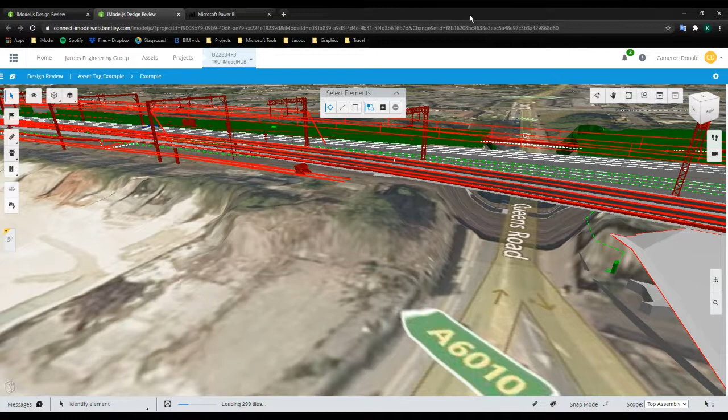Now, that's brilliant if you want to know one asset, but the network rail, the railway project that we have, is significantly longer than one asset. How can we answer this question at scale? So we've thought about different ways - we've used Python and other scripts - but what can we use the data warehouse to really empower it?

So what are the logics here? Okay, it's brilliant, I might want to reach that bridge here, but what if actually this is good - this is, as you can see, it's loading up slowly in the background - there we've got this, this is steps. There's no use going up steps if you want to get a car onto the railway or a road-rail vehicle. You want to get access via a track-based vehicle - you're not going to be able to go up steps, you're going to have to go a different way.

What if there's a blockage? So an incident has happened to the east. I need to come to this area from the west. How do I overcome this? What data do I need to do this?

Okay, what about—actually, we've talked about this bridge. What if I want to go to the left? I want to go to the overhead line a few meters to the left. I want to go somewhere else. I want to continue with these different assets.

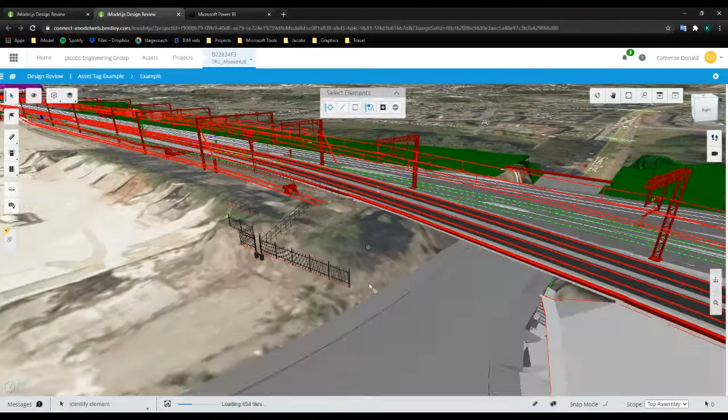We thought, well, actually, there's loads of different combinations of how you can want to access an asset, and there's loads of questions you weren't asking. So rather than waiting for someone to ask me the question, how can we use the data warehouse to answer this? What we did is we separated the rail project into 1 yard units.

The railway works on a system of ELR and mileage. Those mileages are separated into yards, so it's a common unit of measure. One yard, for scale, is roughly—you can see there's a fence there—it's roughly equivalent to each one of those fence spaces. So we separated the whole unit into those 1 yard sections.

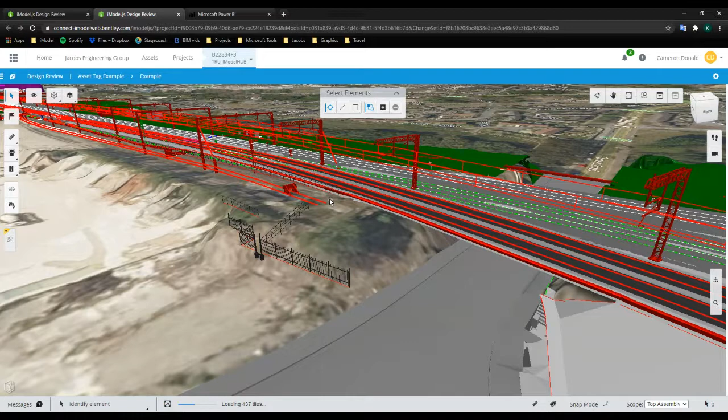For each of those 1 yard sections, we then matched that section to every single access point. We worked out every single combination—roughly 200 million. With the power of a decent spec server, it took us about half a day to work out how to solve the problem. But now it takes 5 minutes to rerun and work out those 200 million combinations.

Whenever we find a new access point, the designer comes up with a new one, or they find out we've missed one, or they found a bit of extra information, we can recalculate that data.

Now, what does 200 million mean? It's a big number and it's nice, and it makes me quite proud of the database to say. But what does that actually mean for people like Aaron?

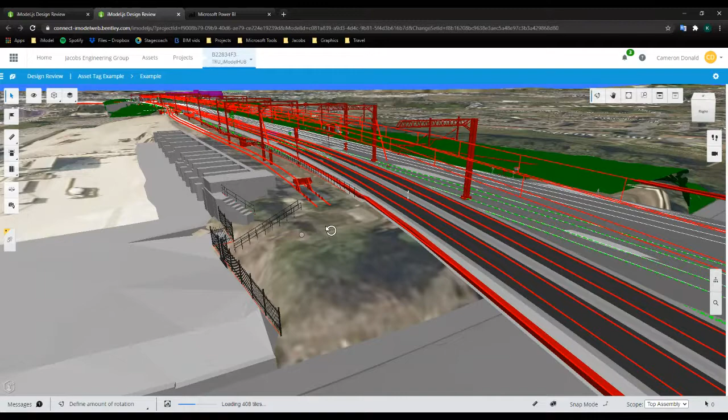Well, with those 200 million, they don't have to worry about what is the best way of answering it. They can look at the second best, the third best, the fourth best. They can look at access from the east, from the west, up the rail, down the rail, left-hand side, right-hand side of the rail. They can review that any way. They can look at, okay, if I routed traffic in a different way, what does this one look like?

We're not just presenting—my job is not just to present one option, it's to present Aaron and Blair with a data set that enables them to model all the options. And that's a key thing: those data connections and that data understanding allow and empower people like Blair and Aaron to do their analytics.

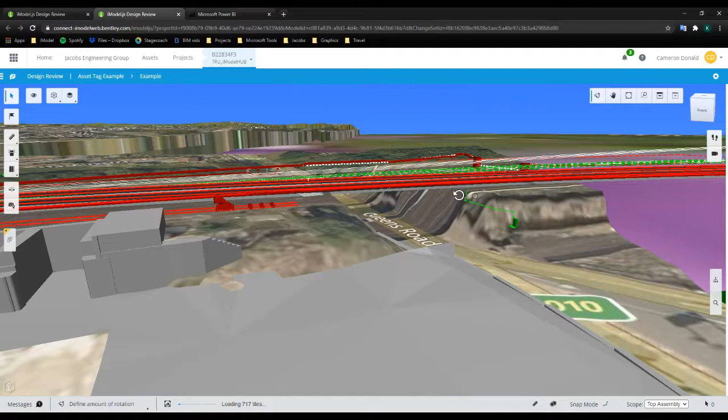Thank you, Cameron, for spinning us around that access point there. I wonder, Blair, can we quickly flick back to the slide deck now?

And thank you for that, Ross, appreciated. So Blair, moving on to the next slide, please, if possible. So what I'm going to talk about is how we've built upon what Ross has just described there, as our sort of today connected environment, moving towards a vision of a digital twin on the Transpennine Route Upgrade.

By the way, for those—it was a little while ago now and I'm not completely sure I introduced myself at the start—Steve Yule. I look after the asset management and information management teams on TRU.

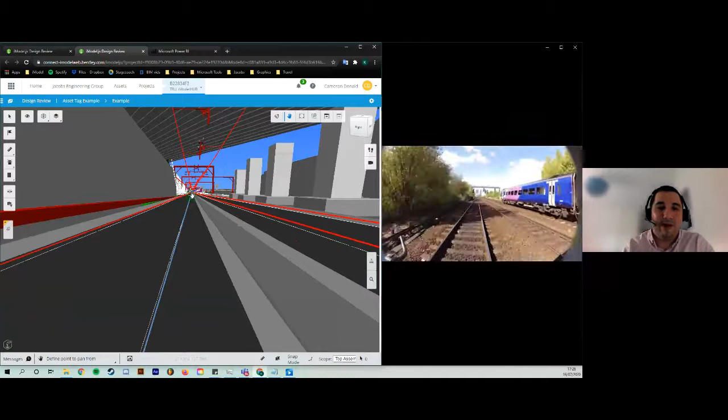It's important to say as well, TRU is also part of what's called Project 13. Our hope is that as we progress this journey and look towards the future - and if Cameron, if you just want to start a quick run through of the model whilst I give a little bit of view on the future - we're hoping that as we go on this journey, and it is going to be a long-term journey over a period of time, we've been very keen to manage expectations with the client organisation on this. This is a significant undertaking to get a smarter, more connected railway where we get the right information at the right time to make the right decisions. But it will be a long-term journey, a long-term undertaking. It does need vision, and it needs leadership backing, and it needs real commitment to make this happen.

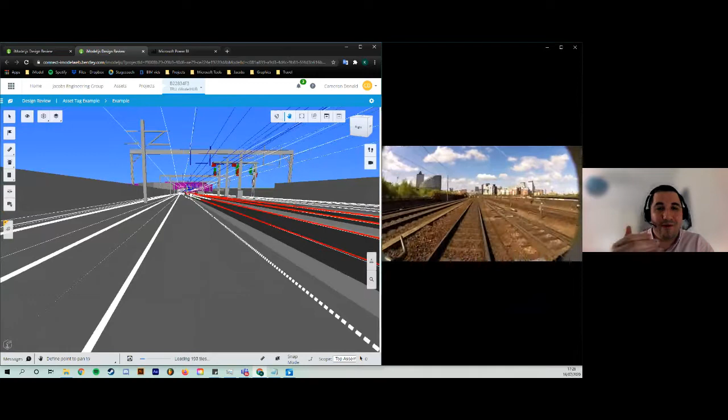From myself, I started out as a civil engineer. My asset management journey was civil engineering, and then moved into asset management because it made sense as a civil engineer. So I was one of those that went on that civil engineering journey. But I see the power of things like a digital twin and the connected environment we're creating as giving such fantastic potential in terms of how we can better operate and maintain the railway. And as asset managers, how we can make better, more informed decisions, ultimately helping that balance of cost, risk and performance, and helping our clients to make more informed decisions, better value for money.

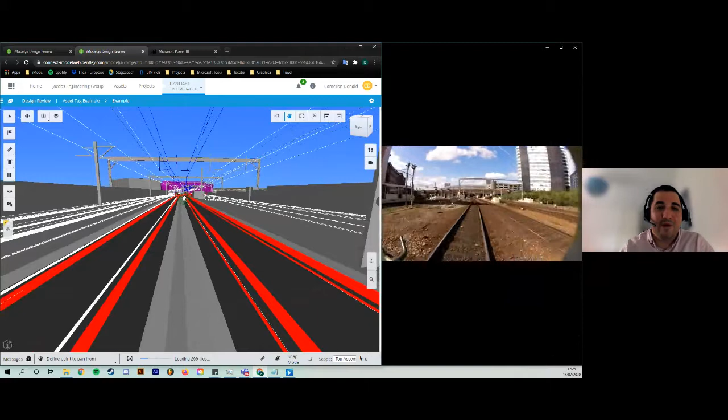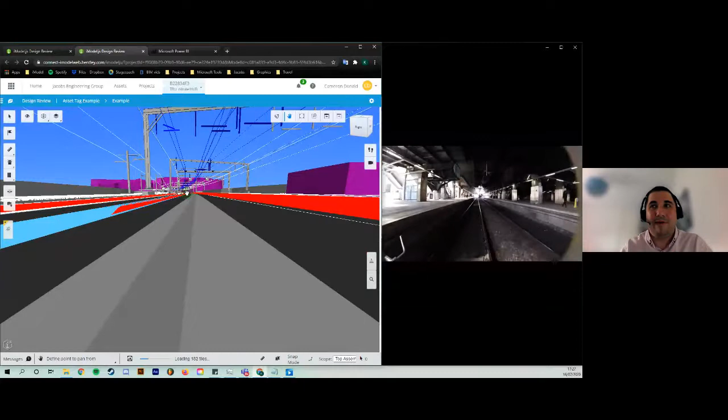But the other challenge we've got at the moment, there's a lot of hype, there's a lot of uncertainty. I think in the past there's been potentially over-promising with capability. It's great to see iModel that Cameron's displaying at the moment, and I think this is really an evolution of where BIM CAD has moved to. I think 10 years ago we were talking about BIM will change everything, and I think people maybe felt it didn't quite get there as quick as people hoped, whereas now tools like iModel are actually making it open and accessible. The fact that you can now open a 3D model in your browser, have that connected to asset data in the background with a central data warehouse, and you can start pulling loads of really useful information from that - it's fantastically powerful. So I do think some of the technology, the tools and the thinking are all starting to coalesce together at the right time, and I'm hopeful that TRU is going to be a program that allows us to actually realise this merging of different things together at the same time.

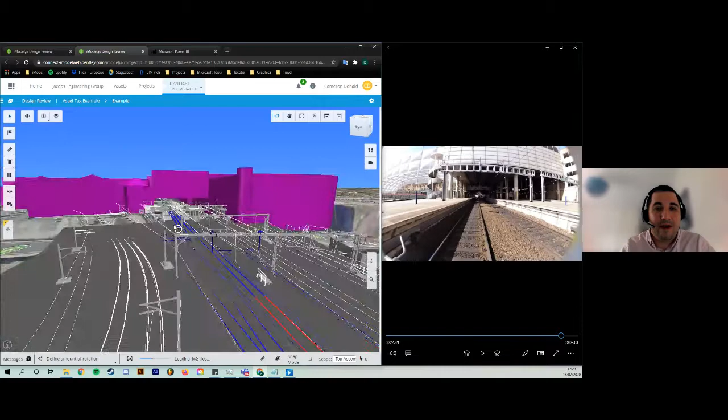So I hope that was useful and informative. Happy to take any questions on digital twin and our digital twin journey, if there are any. And what I'll do now is hand you back over to Richard Rayson. Thank you very much.